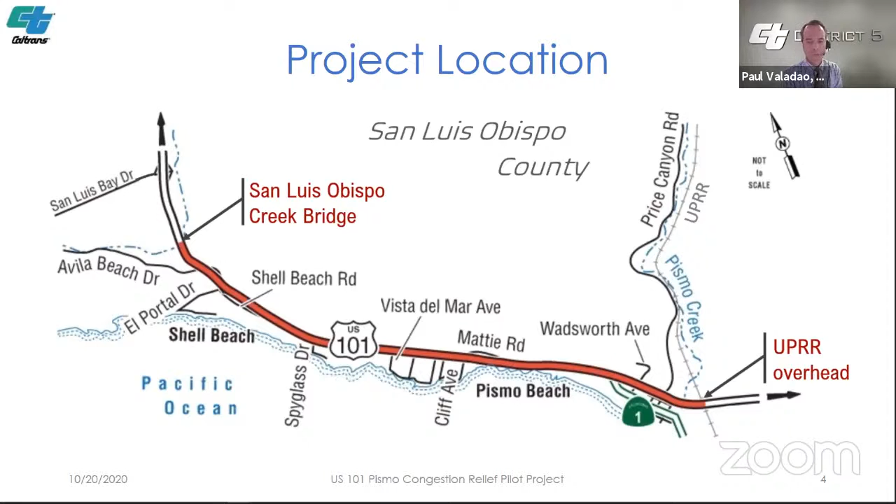Thank you, Stephen. I'm Paul Valadao, and I am the project manager for the Pismo Congestion Relief Pilot Project. The project is located as depicted in the presentation, spanning from San Luis Creek Bridge to the north, traveling along the southbound lanes to the railroad overhead bridge just south of Pismo Creek.

The project's purpose and need is to improve operations on southbound US 101 during peak travel periods. US 101 southbound lanes are operating at or near capacity during those peak travel periods.

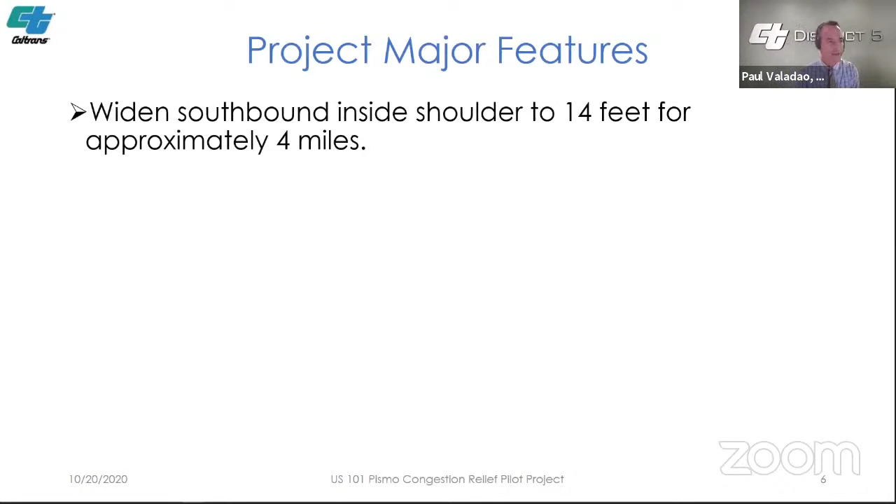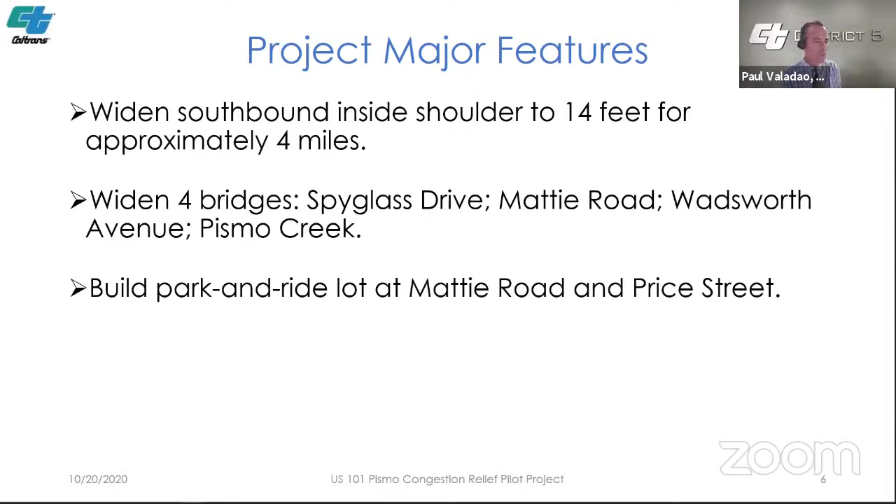The major project features include widening the southbound inside shoulder to 14 feet for approximately 4 miles. In that 4-mile widening, there are widenings of 4 bridges: Spyglass Drive, Mattie Road, Wadsworth Avenue, and Pismo Creek. As part of the project, there is a park and ride lot at Mattie Road and Price Street. We'll go into detail of that location here in a bit.

Finally, the major feature I would like to highlight is the construction of a retaining wall between 101 and Price Street, where we're trying to avoid the Pismo rock, which requires widening to the outside in that one instance.

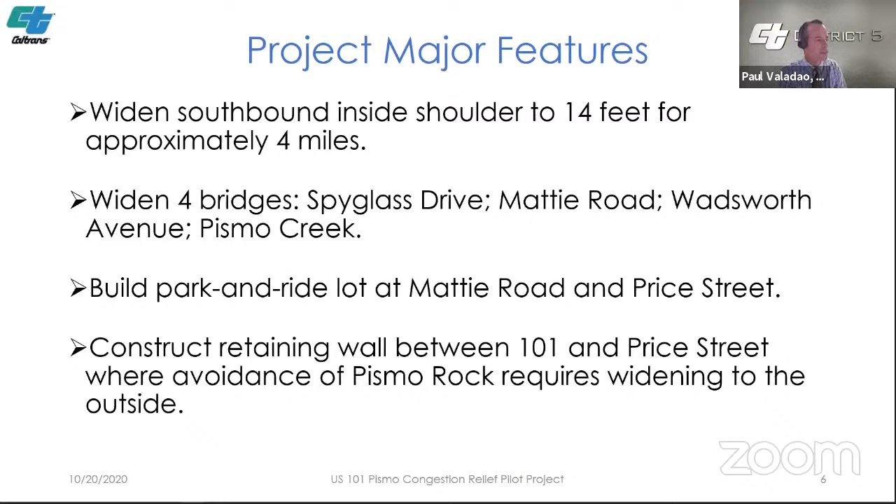Some of the alternatives that were considered but rejected include a full-time general purpose lane. When you're dealing with a full-time general purpose lane and not a part-time travel lane, it requires much wider shoulders to the left and right of travel, and our corridor through Shell Beach and Pismo Beach is just not wide enough to accommodate that.

Also, a high occupancy vehicle lane, sometimes known as a carpool lane or HOV lane, was not considered simply because that 4-mile length is often not enough of an investment in length to buddy up with a coworker and form a carpool.

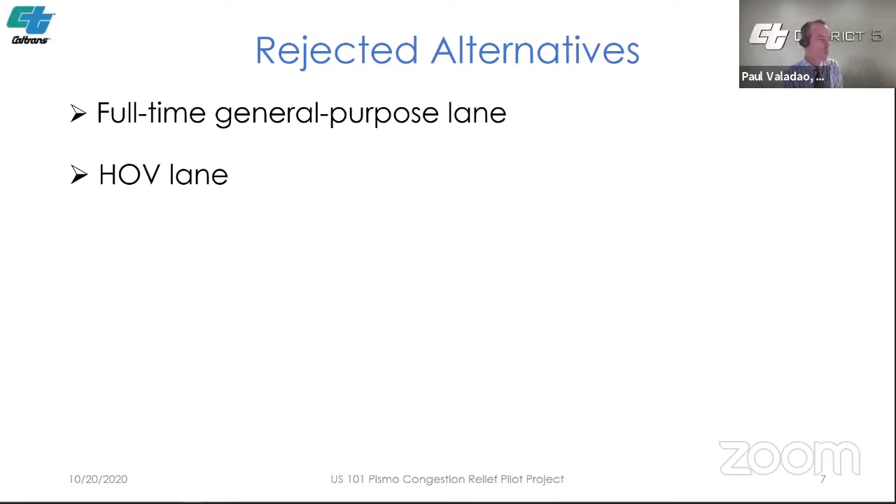Also, a median to house a reversing lane was not considered because of the coastal terrain. We're nestled up against the coastal ranges alongside the coastline, which simply was not conducive for a reversing lane.

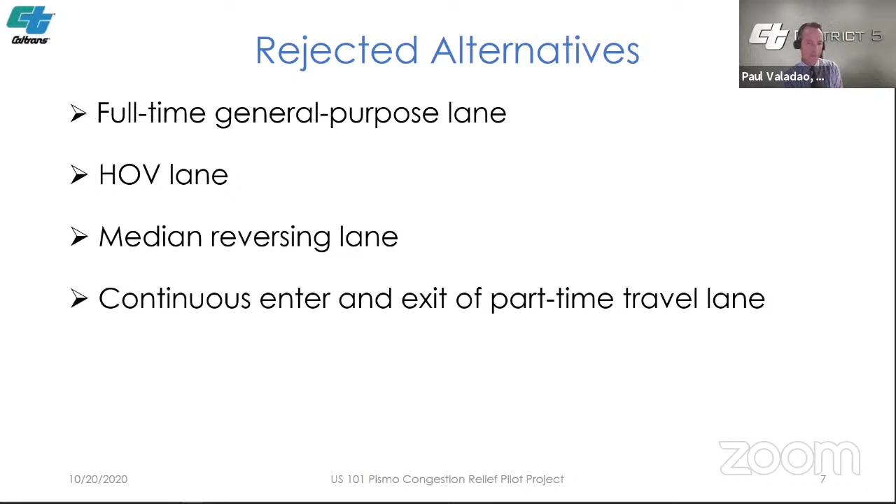Also, continuously entering and exiting this left shoulder part-time travel lane was not considered because it took away too much efficiency. So we have one enter, one exit for this part-time travel lane, maximizing efficiency for this 4-mile component.

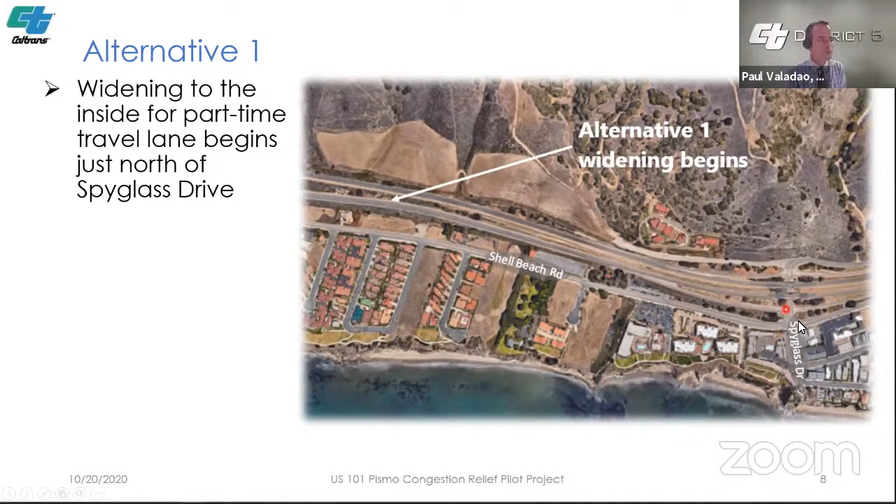We have 2 alternatives being proposed. The first, Alternative 1, is widening to the inside for the part-time travel lane, beginning just north of Spyglass Drive. It includes a median retaining wall at the start of the widening, and there is a variation to this alternative which extends the truck climbing lane that currently exists past the Spyglass Drive exit.

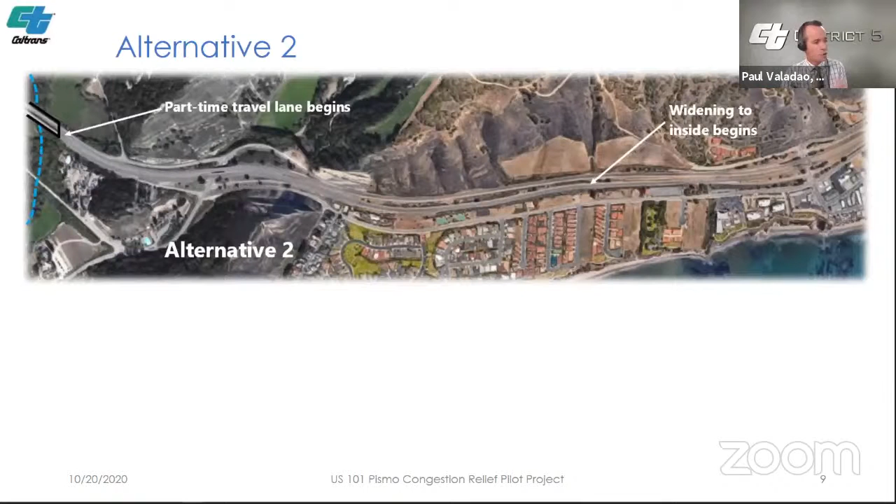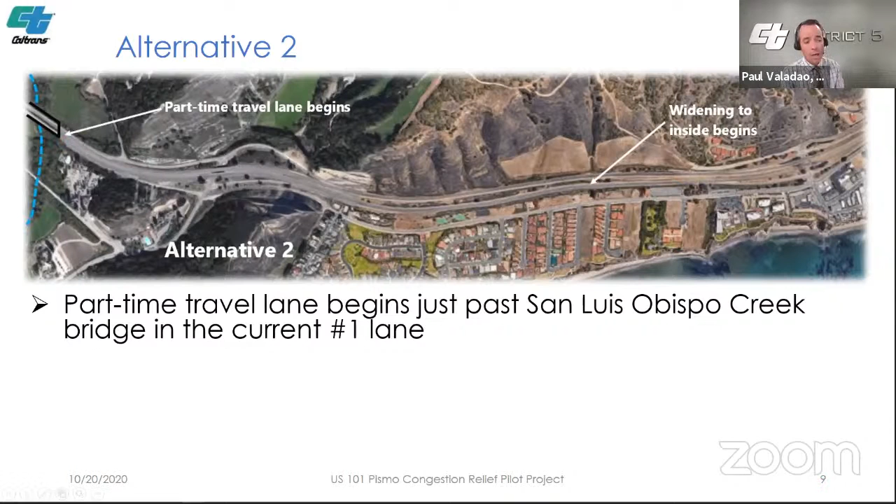Alternative number 2: the part-time travel lane begins just past San Luis Obispo Creek Bridge in the current number 1 lane, or leftmost lane. The truck climbing lane becomes a general travel lane, and the widening to the inside for the part-time travel lane begins north of Spyglass Drive.

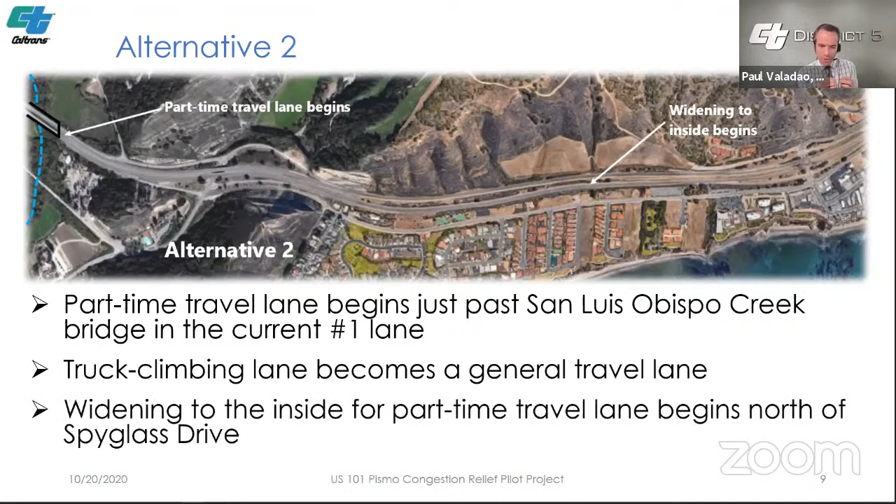Regarding the truck climbing lane in the context of these 2 alternatives: Alternative 1 without the variation maintains the truck climbing lane in its current configuration. Alternative 1 with the truck climbing lane variation extends the truck climbing lane to merge after the Spyglass Drive exit.

Alternative number 2 is to convert the truck climbing lane to a continuous general travel lane, taking that pavement real estate and using it all to configure the new left shoulder part-time travel lane and the two through lanes.

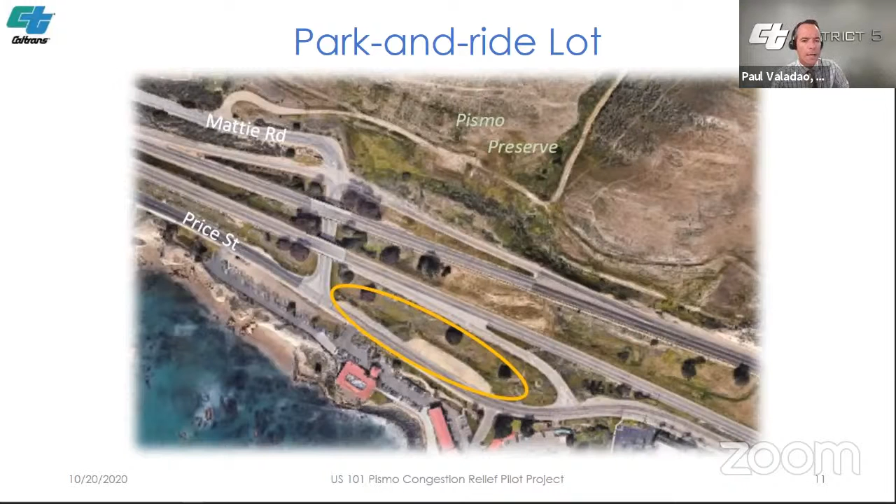As indicated earlier, and now honing in on the location, what you see encircled is the proposed park and ride lot. The dirt park and ride lot that's informally used will be expanded with more pavement and some more formal spaces to park in. Now I hand over my component of the presentation to our environmental coordinator, Paula Huddleston.

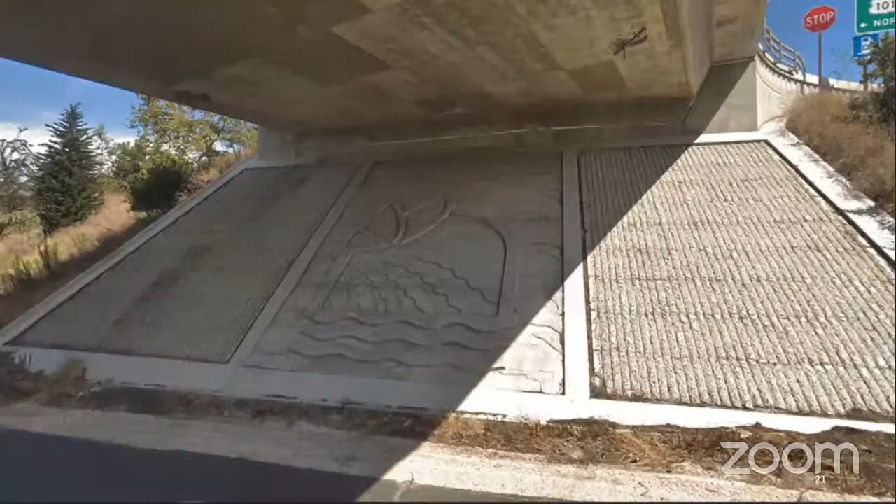The next slide, this is slope paving on 101 in Goleta. This is an idea that could be incorporated into our project because we will also be having slope paving. And the next slide's another example of slope paving.

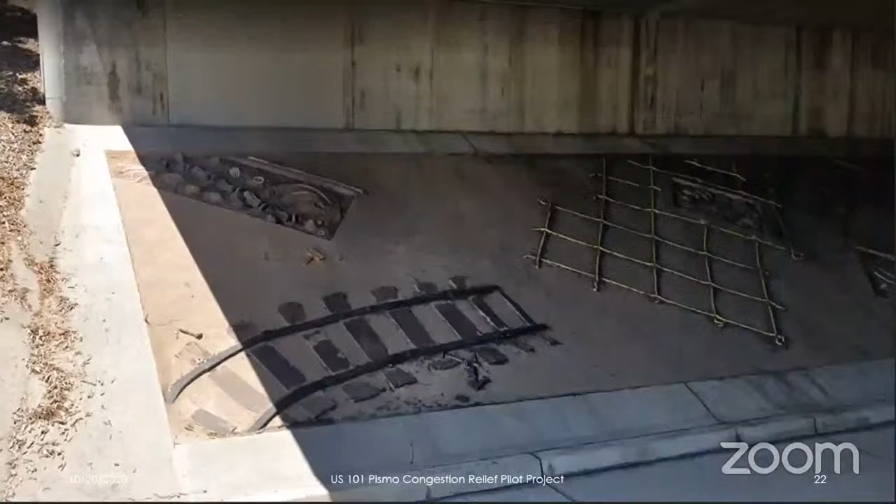It contains photos and information on the historical significance of the bridge. A lot of these were picked up by visitors to the Cold Spring Tavern. They thought it was really interesting.

So those are just some ideas of how we might create installations highlighting the Native American presence in Pismo. We'd work with the Chumash to come up with ideas that were specific to our region.

Okay, moving on to noise. I know this is what a lot of you want to hear about. It's important to note that the freeway noise level is expected to increase as a result of the project because people are going to be driving faster.

Whenever we have a project that could increase noise levels above 67 decibels or by more than 12 decibels, we are required to consider noise abatement. In this case, that would be noise barriers or sound walls.

It's important to know that we are not talking about the concrete safety barrier on the outside shoulder of the freeway. The sound walls would be from 8 to 12 feet tall.

I also want to stress that the sound walls we're going to be talking about today are not a definite part of the project. They're being evaluated as required, and no decision has been made yet about including them or not. The studies were done to show what would be necessary to reduce the noise levels from the project.

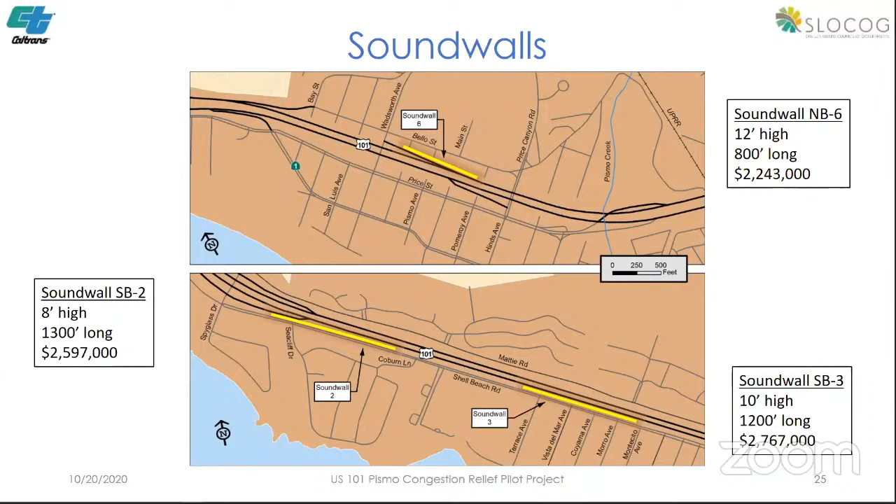Each of these walls has been estimated to cost just under $3 million. A decision about these sound walls won't be made until much later in the process, after we've heard from you and are starting final design of the project.

So as you can imagine, sound walls would have a major impact on the appearance of the freeway corridor and of the town itself. And most importantly, the southbound walls would block ocean views.

Even without the sound walls, though, the project would have a significant adverse impact on visual quality. The additional lanes, wider pavement, retaining walls, loss of vegetation, the lane use control signals - all of these components will create a much more urban appearance to the freeway corridor and would be somewhat out of scale with the rest of the small beach town community.

We've prepared some photo simulations of how the project could look. Now, keep in mind that these are just conceptual images and they're not necessarily how it will actually appear.

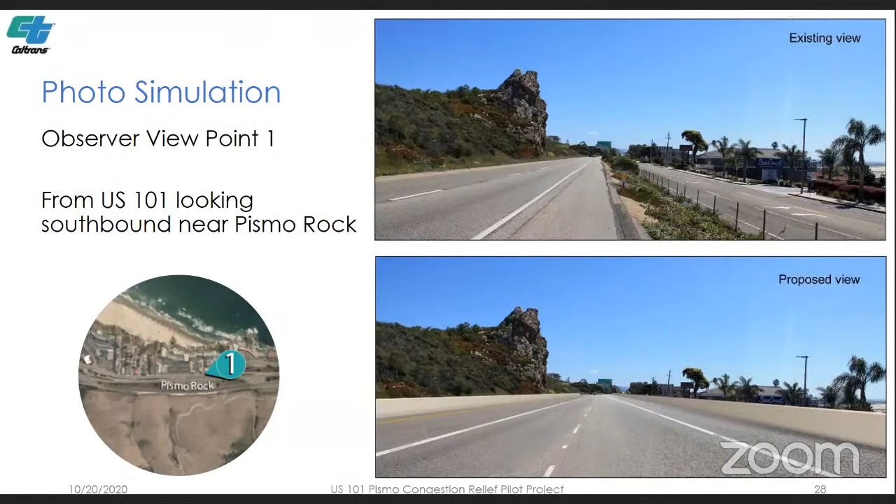At this location, the freeway lanes would have to be shifted over to the outside in order to swing around Pismo Rock. So that median would be filled in and a retaining wall constructed along Price Street, and then the safety barrier placed on top of the wall.

The part-time travel lane is shown on the left, and you can also see the new concrete median barrier, which is going to be taller than we've had before.

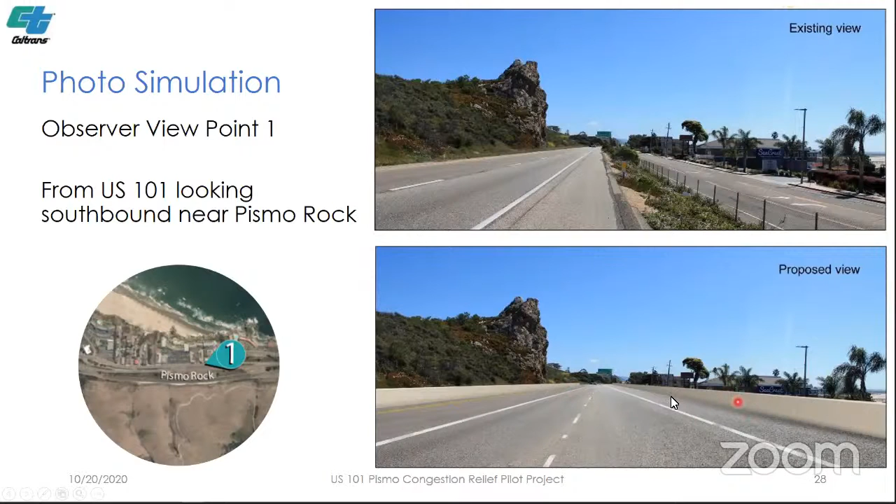The next slide, viewpoint number 2. This is looking southbound in the vicinity of the sound wall number 2, which you can see on the right. If this wall were built, it would actually sit on top of the safety barrier, not behind it, and the appearance would be a little more seamless than shown in this photo.

You can also see the new median barrier on the left. Any of the walls, the median barrier, any concrete surfaces - these would all receive some sort of aesthetic treatment like color or texture or both.

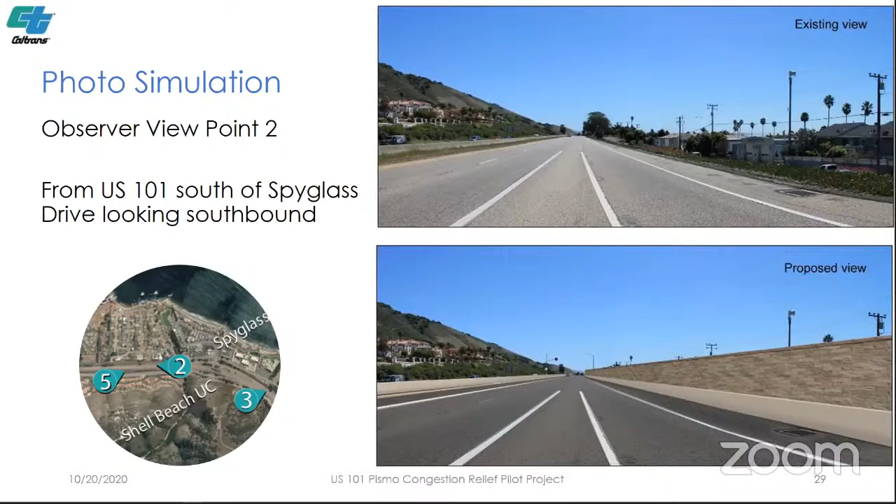The next slide, viewpoint number 3. This is from the northbound lanes looking towards the coast, and you can see the new median barrier. Depending on the height of your vehicle and its position in the lanes, this barrier could obscure the ocean view.

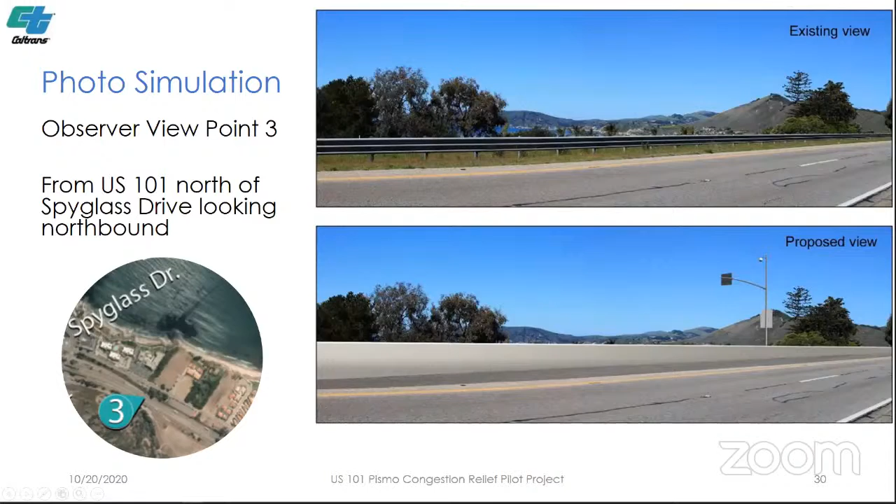Next slide, viewpoint 4. This is from Shell Beach Road looking towards the highway in the vicinity of Sound Wall 3. We haven't made any decision on what sort of aesthetic treatment any walls or other surfaces would get at this point. We would revegetate as much as possible as well. The vegetation shown in this simulation would be after several years of growth.

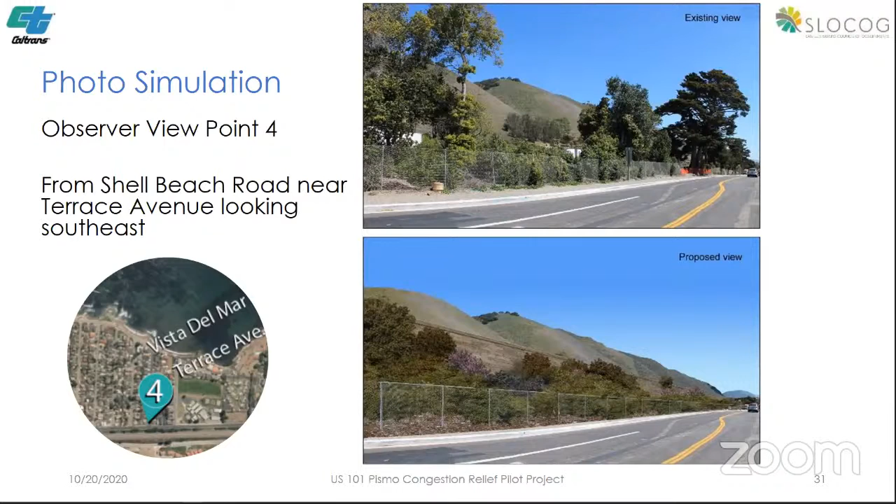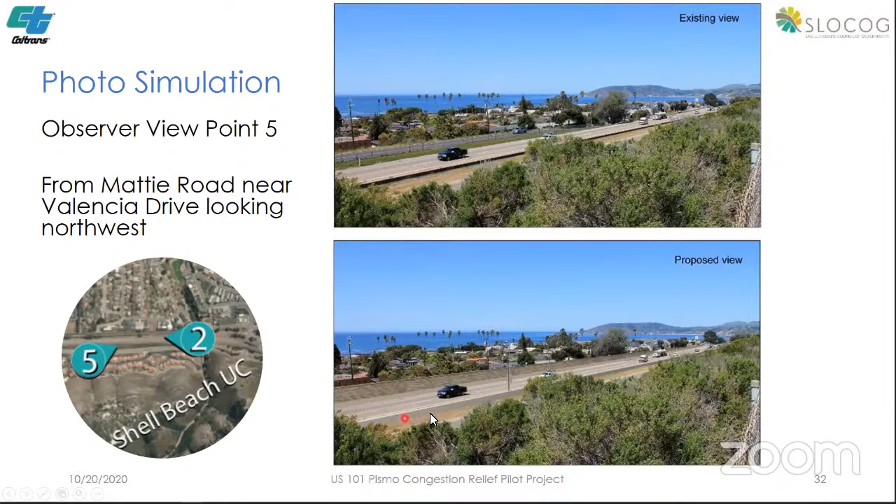The next slide, viewpoint 5. This is from Mattie Road looking down on the highway towards wall number 3 in the background, and you can also see the southbound lanes as well as the median barrier.

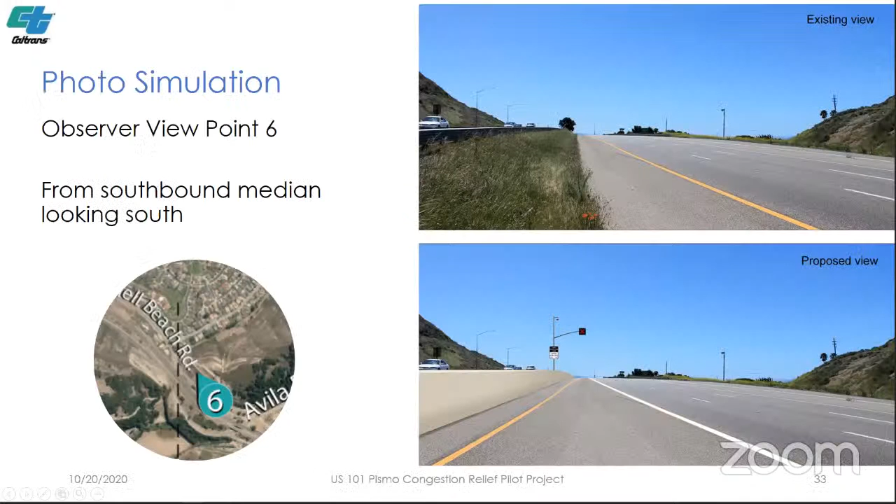The next slide, viewpoint number 6. This is at the northern end of the project looking southbound. This shows the new part-time travel lane that would be replacing the median, and you can also see one of the lane use control signals. Again, these images just give a rough idea of how the project would sit within the existing corridor.

So moving on to air quality. We all know that traffic congestion creates pollution and poor air quality, and you'd think that by improving congestion, we would improve air quality as well. However, once vehicles are going faster than about 55 miles per hour, they actually become less efficient and start producing higher carbon dioxide levels.

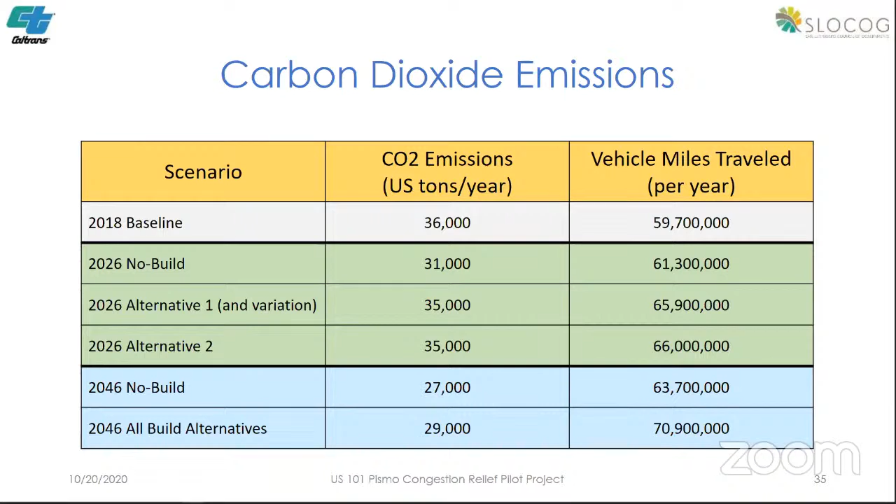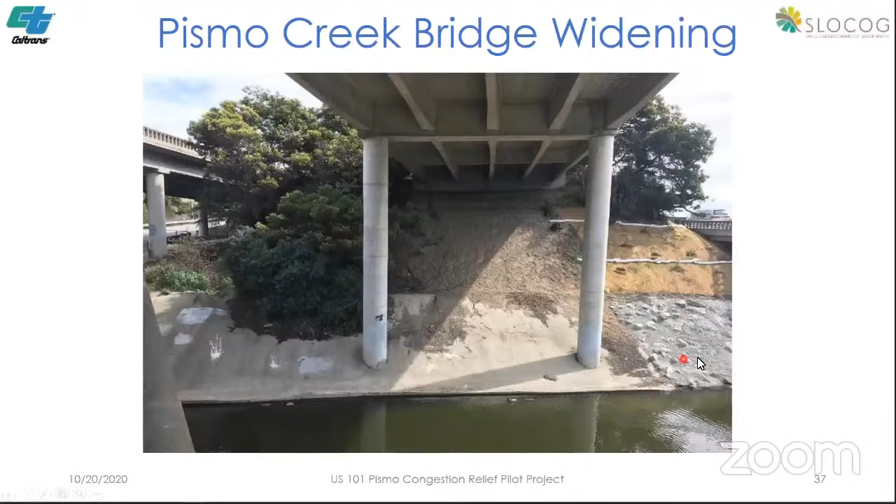Moving on to biology, the project really isn't expected to have much of an impact on biological resources. Mostly it would involve the work being planned with widening the Pismo Creek Bridge. In the next slide, you can see the bridge here looking in the southbound direction. We'll be putting in a new column on the left, and the slope paving would all be replaced with grouted rock slope protection like you can see on the right there of this photo.

Next photo, again, you can see the 2 new columns shown in red. We're also going to be installing sheet piling at the base of the slope. The sheet piling will result in a crenellated edge like what you can see on the left side of the creek there.

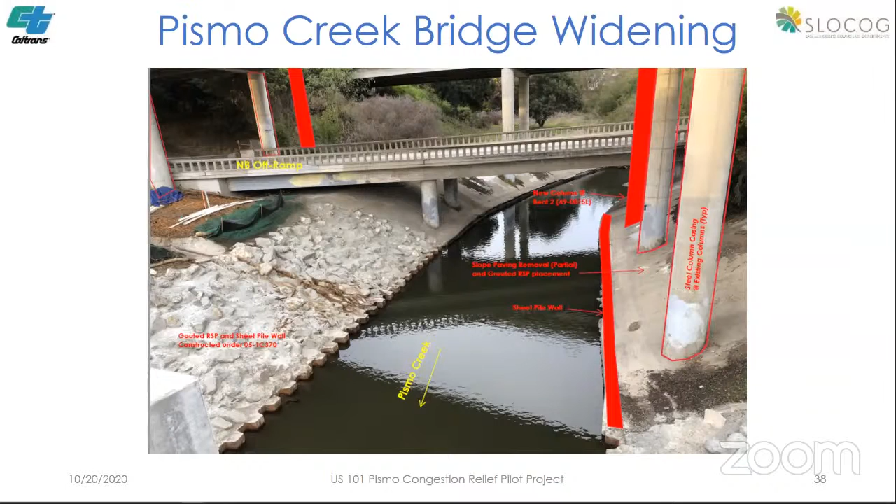The sheet piling is going to require a little bit of dewatering. We're going to use gravel bags, just dewater the small area needed, take the gravel bags back out, and that's pretty much it for the creek.

The project's going to require several permits from other agencies. Most of these are for the work being done in the creek, but an important one I want to call attention to is the Coastal Zone Development Permit. This permit is important because it's going to provide another opportunity for a hearing and public input. The project is actually within the jurisdiction of 3 separate permitting agencies.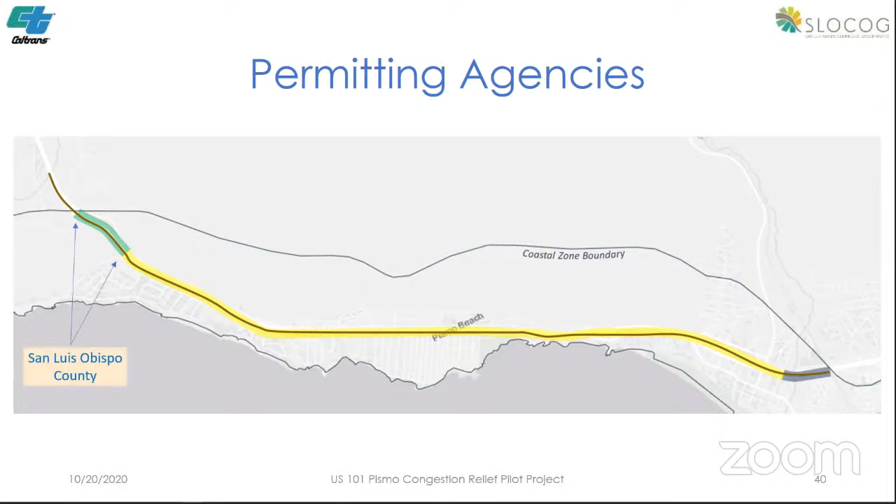Thank you, Paula. That was a great presentation on our environmental stewardship by the project.

Good evening, everyone. My name is Sam Toe, and I'm the traffic operation engineer for this project. I'm a Cal Poly alumni who has worked for Caltrans District 5 traffic operations for more than 20 years, and I love living in this beautiful Central Coast, having been in this area for over 30 years. So as everyone knows, this is a congestion relief project.

Right-sizing the project is very important through a detailed traffic operations analysis before any solutions can be proposed. Therefore, we need to first understand the issues that the corridor is having. So how do we go about identifying the deficiency of this corridor? We do it by field observation and field data collection.

For the next 10 slides, I'll be using Google navigation map that most people are familiar with to illustrate the existing condition. To orientate everyone on the map, the Pismo Rock is right there, the Dinosaur Cave, the Spyglass Interchange, and the Avila Beach Drive Interchange. So everybody can get yourself orientated on the map, and as we go through the slides, you'll get to know what we're talking about.

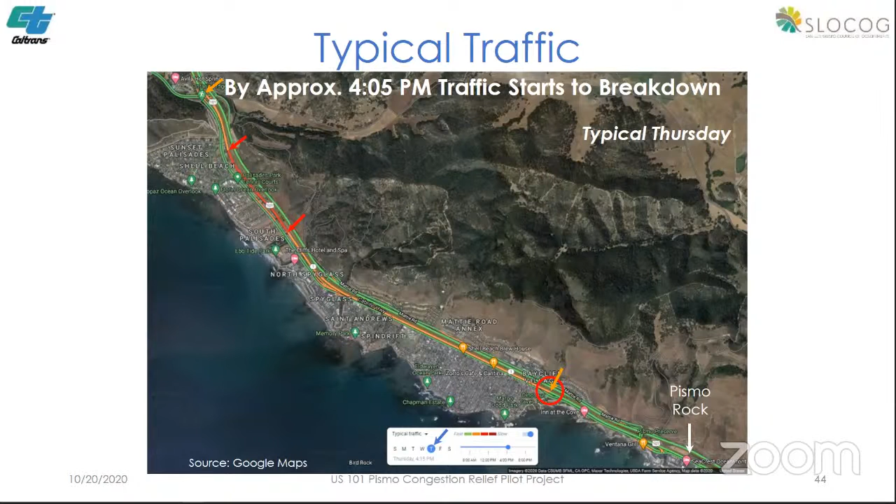The next slide is when we reach around 5:05 p.m. We start to see traffic start to ease up a little bit. And in the next two slides, you also see that the bottleneck would fluctuate between Spyglass and Shell Beach area, as indicated by the red circle, and the slowdown segment will fluctuate as well between Avila Beach Drive and Shell Beach area.

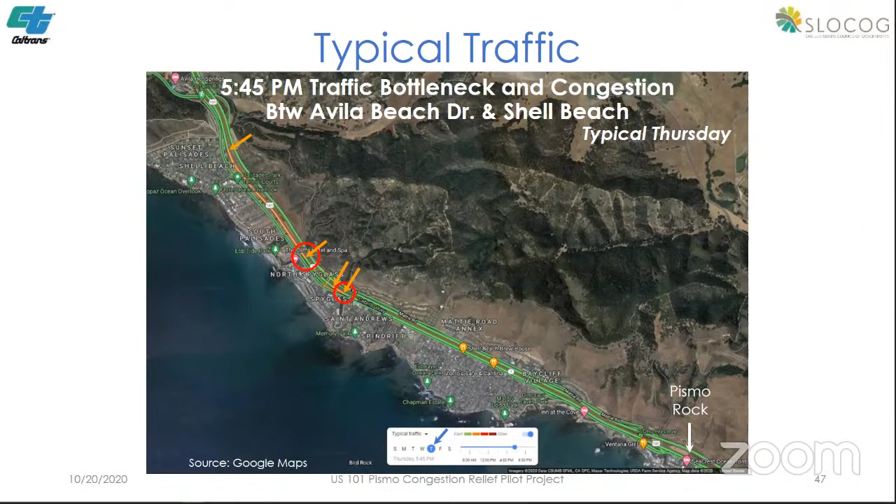So we go to the next slide at 5:25. You can see the bottleneck and where the slowdown segments are at 5:45, and you start to see the traffic is starting to ease up a little bit around 5:45. So if we toggle back and forth between 5:05 and 5:45, you can see how the bottleneck and the slowdown of the traffic fluctuates between this time period.

Okay, and then the next slide will be at 5:55 p.m. You see that the traffic is free-flowing again. So this is for a typical Thursday traffic.

And someone may ask, how about Friday? How about Friday typical traffic, how does it look like? If we go to the next slide, Friday typical traffic would start to slow down around 3:25 p.m. That distinct bottleneck that we talked about gets closer to the Pismo Rock area, and the traffic congestion would extend from Pismo, San Luis Obispo Creek all the way down to near where Pismo Rock is.

Also, we see the stop-and-go traffic was observed between Avila Beach Drive and the truck climbing lane merge, as indicated by the red line. This breakdown would last about an hour as well, and the congestion will continue to around 6:10 p.m. on a typical Friday. Now, how about Saturday?

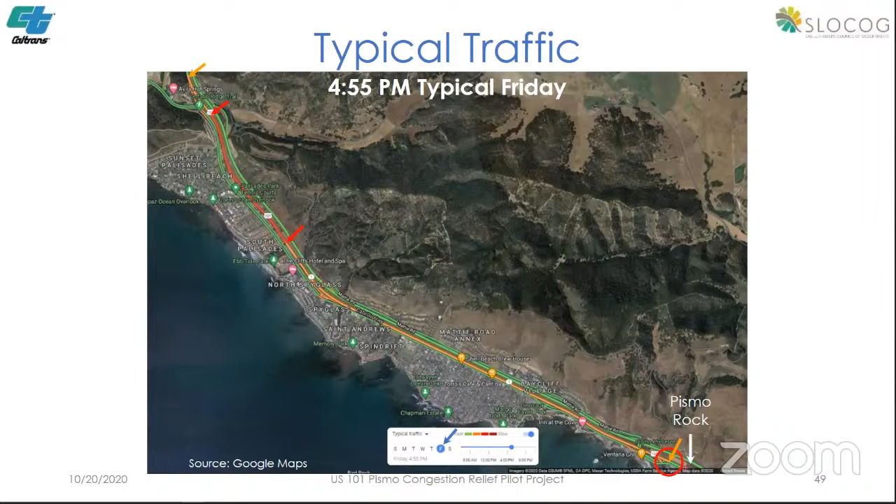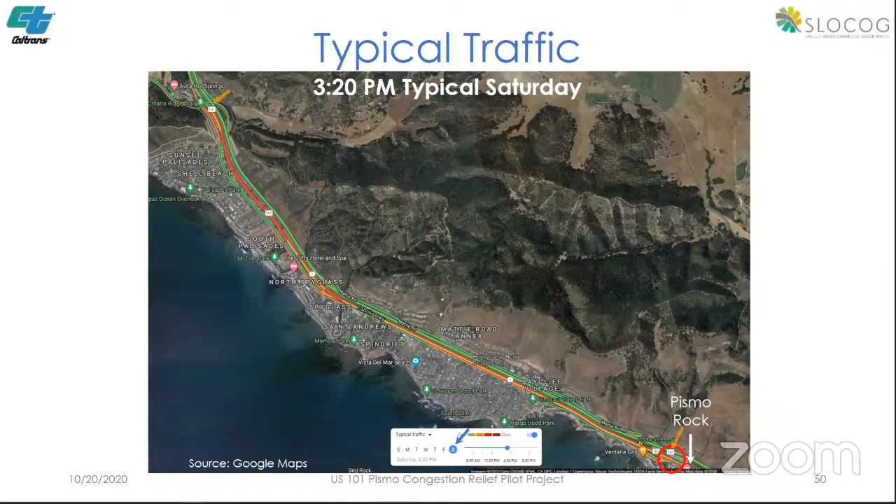Saturday typical traffic, how does it look like? We see the slowdown starts around 2 p.m., and the distinct bottleneck would occur between Dinosaur Cave and Pismo Beach as well. This is the extent of the congestion as shown by the red, orange line and the orange arrows.

The stop and go conditions would start around 2:30 or so between Avila Beach Drive and the truck climbing lane merge area, which is very similar to what we've seen in previous typical day's traffic. The traffic breakdown lasted about 2 hours and 15 minutes on Saturday, and congestion continued to about 5:40 p.m. on a typical Saturday.

With this understanding of the existing condition, during our traffic studies we ran through 122 scenarios of combinations of improvements that we could think of. The top three scenarios that surfaced gave us the best traffic performance and benefit cost ratio, and are the right size for this corridor. We selected alternative one.

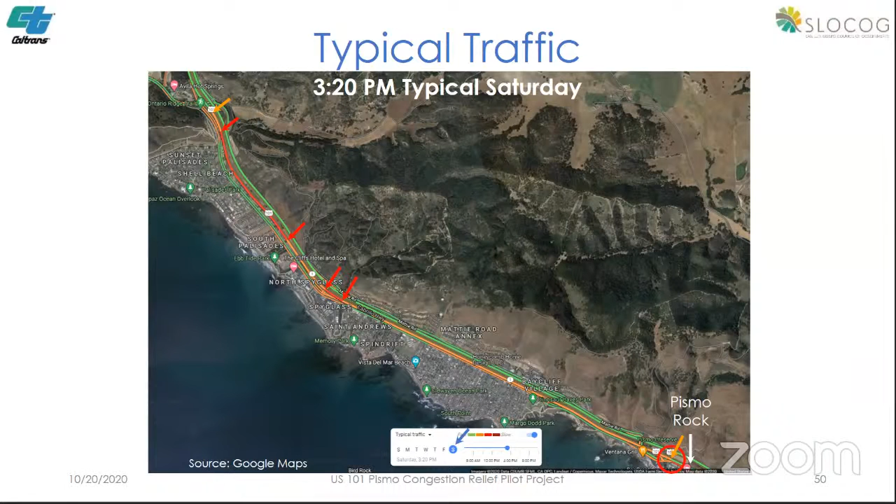Variation, and alternative 2. Traffic analysis were performed for the year 2026 and 2046, and the conclusion from that study is that the part-time lane will continue to perform well beyond 2046 during the peak periods of 2 p.m. to 7 p.m.

So the next slide, we're going to show everyone the traffic control devices that will be implemented in the project. The first thing is the lane control signal, as shown in that green down arrow. It will be mounted on a Caltrans standard signal and lighting standard.

Second will be the sign package that's been approved by the California Traffic Control Devices Committee (CTCDC), the Federal Highway Administration (FHWA), as well as Caltrans headquarters.

Looking at this sign package, these signs will all be placed on the left side of the freeway, and the direction of travel is indicated from left to right, top to bottom. As a driver, as you drive down the freeway southbound, the first thing you will see is a sign that says left shoulder driving permitted 1 mile ahead.

Then a quarter mile down the road, you'll see shoulder driving permitted on green arrow. Further down another quarter mile, you'll see left shoulder driving permitted half mile ahead. Then it's repeated by the shoulder driving permitted on green arrow at a quarter mile and also at the beginning of the part-time lane.

The same sign that says shoulder driving permitted on green arrow will be mounted on every signal pole. As you drive through the part-time lane, as you get close to the end, you'll see shoulder driving ends at half mile, at quarter mile, and then shoulder driving ends. After that you will see two standard signs posted that say do not drive on shoulder and emergency stopping only.

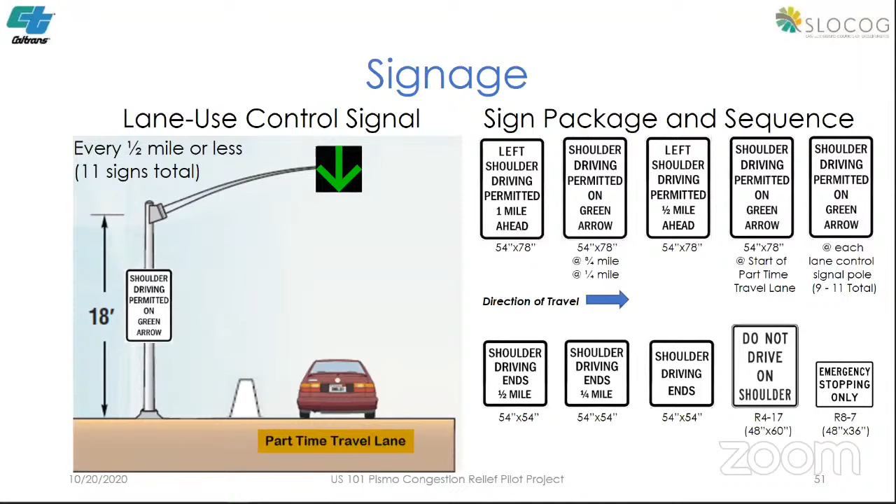Okay, and then the next slide will be a VISSIM traffic simulation for the project that we created. The purpose of this simulation video is to illustrate, from a fly-through view, how it would look like driving through the project. Before I run the simulation videos, a few things I want to point out on the video.

This video is simulating the opening year 2026 and is for alternative 1, which is the part-time lane with the truck lane remaining as is. In the lower left corner you will see a timestamp; we're trying to simulate the traffic at 4:30 p.m. There will be blue text in the video that provides a waypoint for everyone to orientate themselves as we drive down the corridor. Also, this is a split screen video, as you can see.

Sorry, Sam, technical difficulties. Here we go.

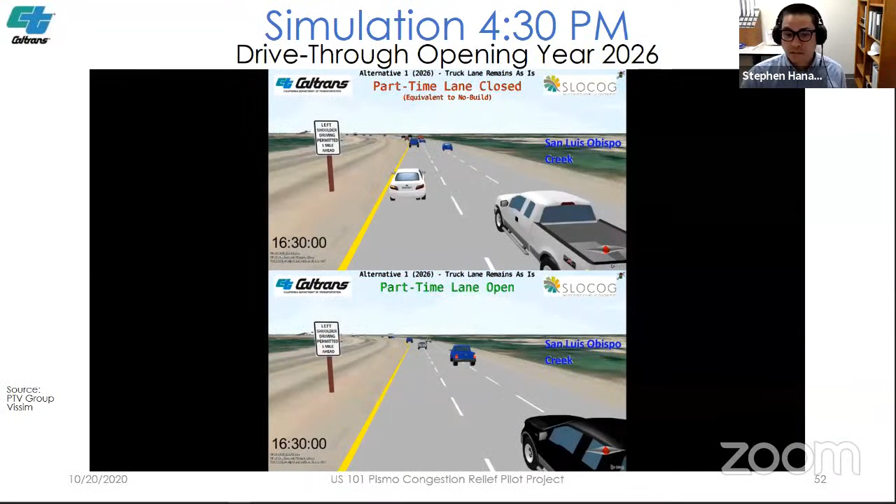Okay, great. You can see this is a split screen video. The top screen simulates the traffic when there is no part-time lane, and the lower screen simulates when there is a part-time lane. In that way, we can compare the difference. This video is sped up 2 times faster because of the time constraint for the presentation. It's a 2 minute long video.

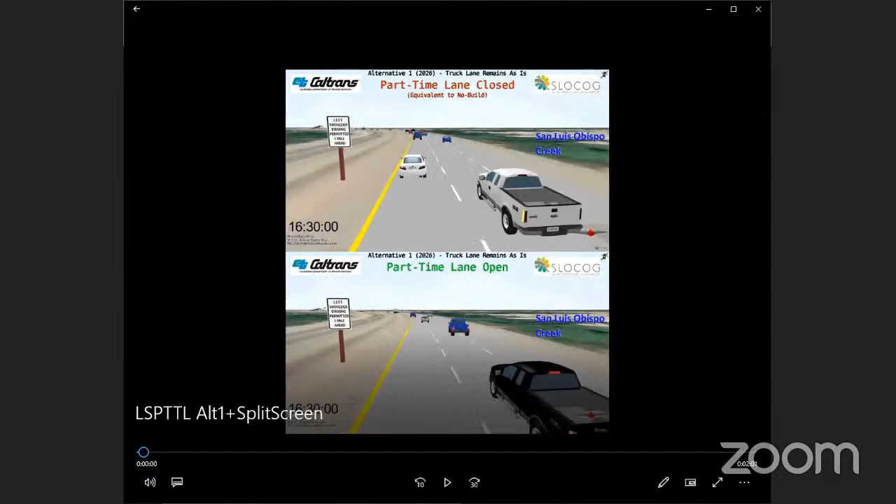This simulation starts near San Luis Obispo Creek, and as we drive southbound, coming up to the Avila Beach Drive off-ramp with the signs on the left. We pass the Avila Beach Drive interchange, coming out of the Avila Beach Drive on-ramp area, and we have the half-mile ahead sign. You can see the top is when there's no part-time lane, which is what we're seeing today, with congestion on the freeway.

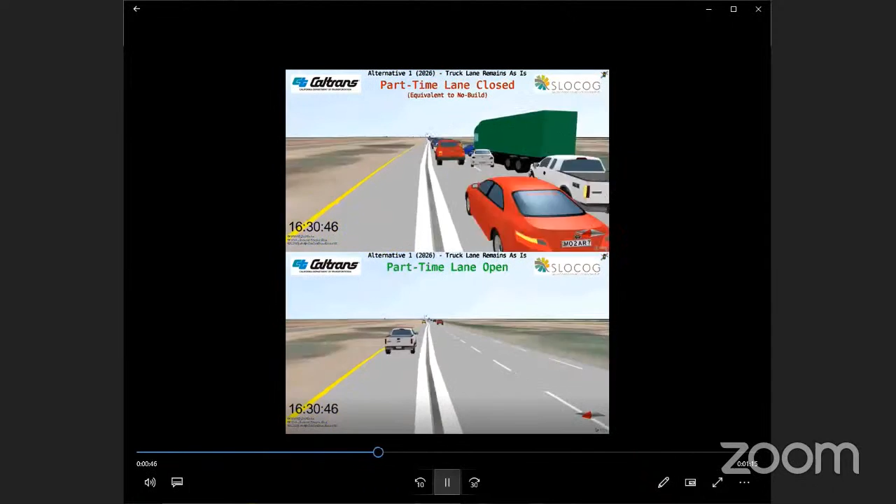Truck lane remains as is. We're coming up to the Spyglass off-ramp area, driving over the Spyglass interchange, and here's the Spyglass on-ramp.

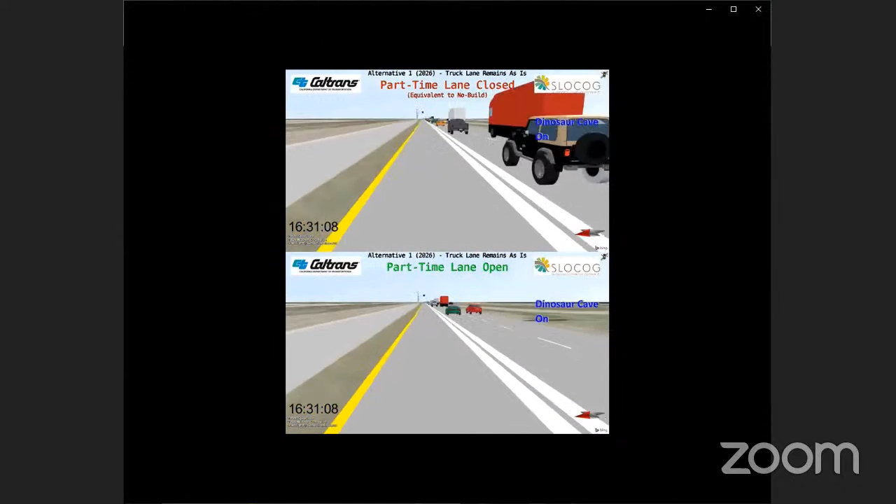As you can see in the top video, the traffic is much denser than in the lower video when the part-time lane is open.

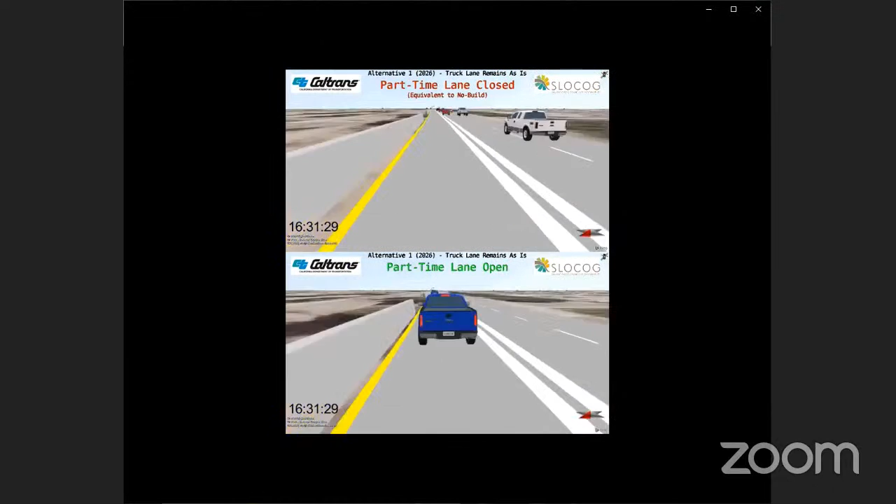Coming up to the Price Street off-ramp, which is the Mattie interchange, and then the Pismo Beach off-ramp. Here's the first sign for the half-mile ending of the part-time lane, then the quarter mile marker. That's the Price Street on-ramp, and the part-time lane ends.

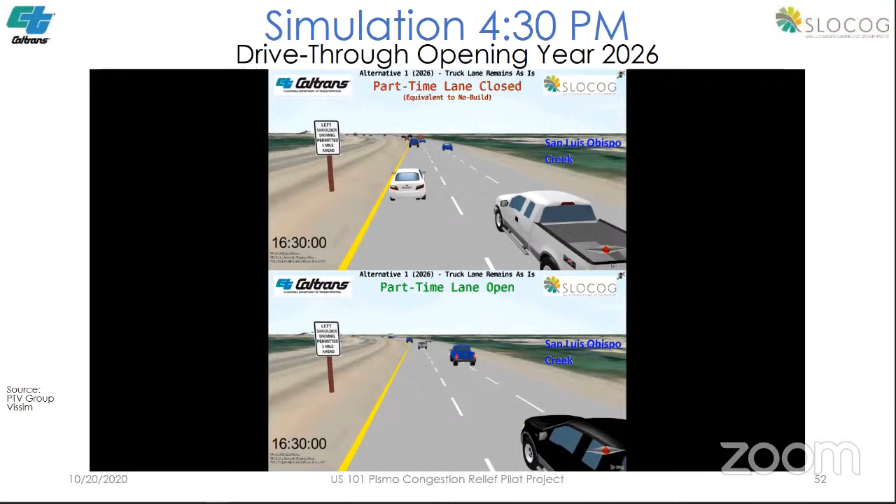I'm Stephen Hanamaikai, transportation planner with SLOCOG. We're the sponsor for this project, and we work closely with state agencies, in this case Caltrans, to fund and build transportation projects.

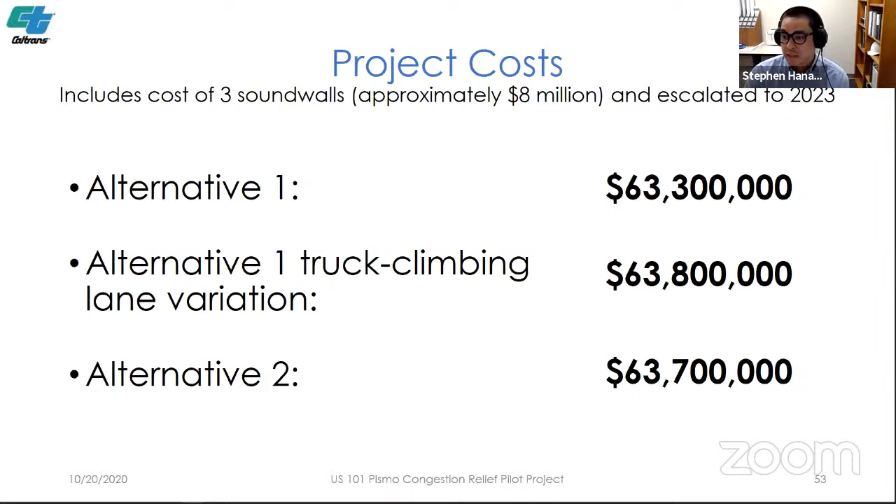What we are showing here is the current spread of construction costs, which includes about $8 million for the construction of three sound walls noted by Paul. These costs are escalated to 2023, the anticipated year of construction. You'll notice slight variation in costs, with a high of $63.8 million and a low of $63.3 million, reflecting slight variations in the designs of the three alternatives described by Paul.

SLOCOG has invested $21.8 million toward a no-sound-wall construction scenario, with a total escalated construction cost of $58 million. Of that $21.8 million investment, half is budgeted toward the developmental phases of the project - the current environmental document phase, design work, and right-of-way - and the other half, $10.9 million, is allocated toward construction.

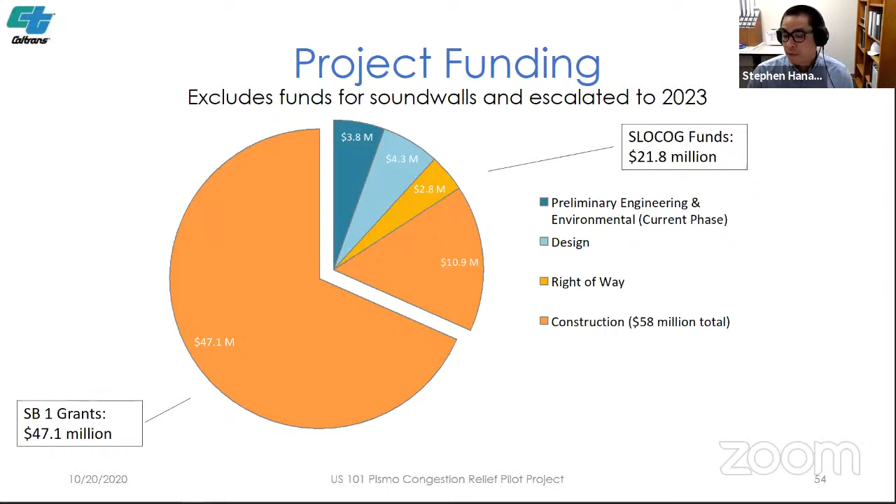For the remaining $47.1 million for construction, SLOCOG is pursuing a state grant, and that application is currently under consideration by the California Transportation Commission. We should know by mid-November whether we were successful in that grant.

This concludes the presentation portion of the project, and at this point we'll open it up to questions and comments.

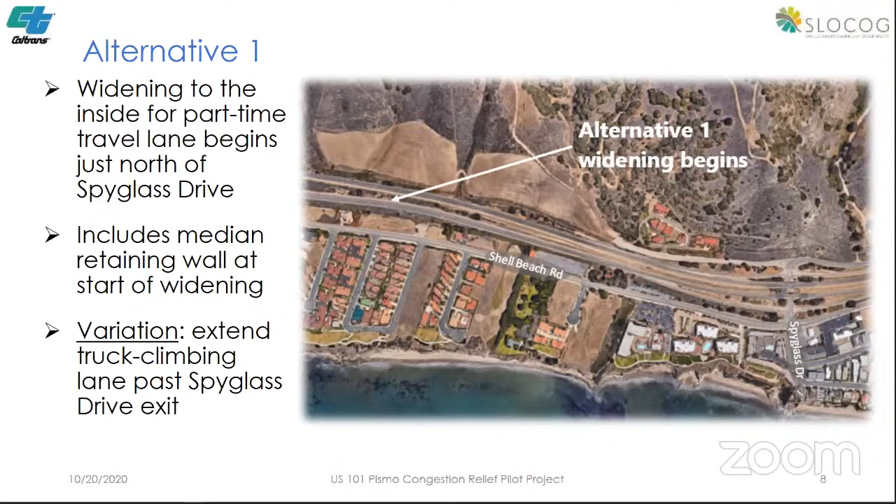As best I could, I took a look and reviewed the 161 pages and tried to digest that. I also printed out the aerial view, the 13 sheets of the proposed plan. As far as my question goes, I was a little confused about Alternative 1 and Alternative 2 regarding the passing lane or truck climbing lane coming up Spyglass. Currently that's a big problem, creating a lot of bottleneck. I'm totally in favor of seeing that extended past the off-ramp, at least past the Spyglass off-ramp. I know people try to use it as a true auxiliary lane, but it still ends up becoming a bottleneck. For those of us who live in Shell Beach, rather than having to merge over into the slow lane and slowly progress for another quarter mile up to the off-ramp, it's a large inconvenience - I say that strictly for the residents here.

So I don't know how the alternates work here. If the truck climbing lane is extended at least past the off ramp, does that change where the shoulder, the temporary use lane, begins? Or does that temporary use lane begin at the same point further down the hill towards Avila? That's my question. I've got a couple of questions or comments, if I could go ahead with my comments before the question is answered. Yeah, let's go ahead and do that, and then we'll have Caltrans speak to your question about the operation of the three alternatives.

Okay. The retaining wall along Price Street, between Mattie Road and wherever it goes, is 1,200 feet long or whatever it is. That retaining wall, I understand the purpose. It's in order to widen the lanes and shift them to the right towards the beach, the ocean side, and get them around the Pismo Rock.

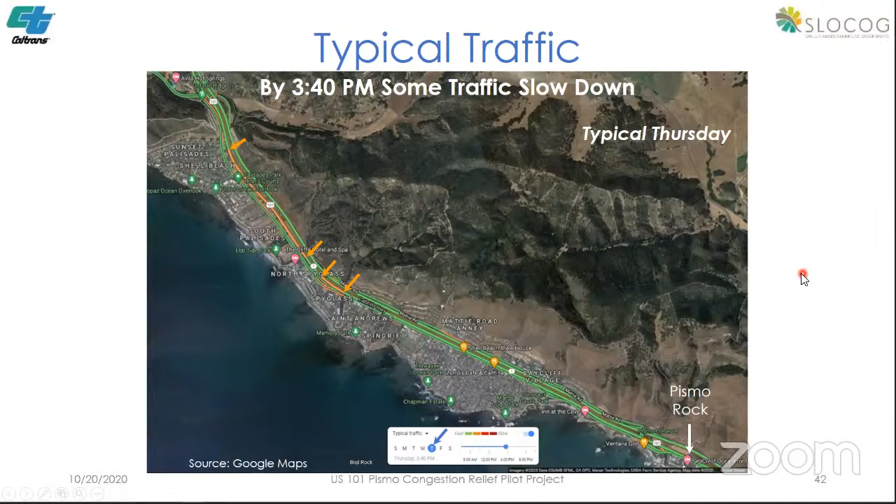Sam, did you want to respond to this? George, I appreciate your comments. I can respond to that. So if we go back to my original second slide of the presentation, we see that the actual bottleneck causing the slowdown that backs up all the way to the Spyglass area and also the Avila Beach interchange is actually further down south. But we do recognize that the truck climbing lane does exacerbate the problem.

So if we look at the second or third slide, that circle is actually where the real bottleneck of the freeway is, causing a slowdown that backs up all the way north. So for alternative one variation, what we've done in our project is start the truck climbing, or part-time lane, about a 1/3 mile north of the Spyglass exit, which is also slightly north of where the truck merge lane is. So we end up with 4-lane capacity right in that section, allowing us to handle the traffic capacity needed to send traffic downstream.

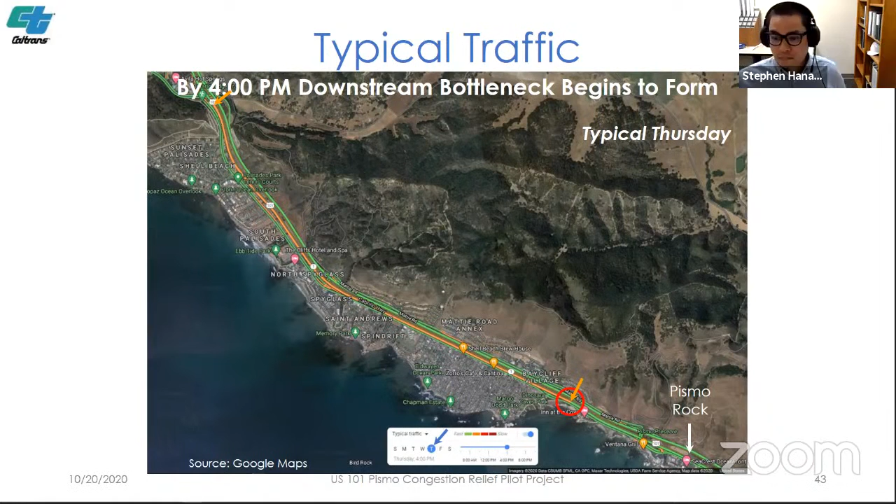And for alternative number 2, we see that we remove the truck climbing lane, which will address your concern about idiots driving through and merging to the left. But we still need the third lane capacity, so we open up the part-time lanes so that we have 3-lane capacity all the way down south through the corridor.

And I hope that kind of addresses your concern. Yeah, thank you. I think that's a great response, Sam.

George, I would encourage you, if you'd like to look more at the traffic analysis and data, to reach out to one of the members of the PDT, the project development team, and we can pass along to you some more detailed traffic analysis.

I appreciate that, and I'll be watching. But if you're not familiar with driving that section of road, even the signage for the truck climbing lane is non-existent, and it's confusing if you go into that lane and then suddenly find yourself on Avila Beach Drive where it merges back into two lanes, a poor location. Also, truckers aren't using that climbing lane anymore because of accelerating cars coming up on their right-hand side, and they can't move over in time.

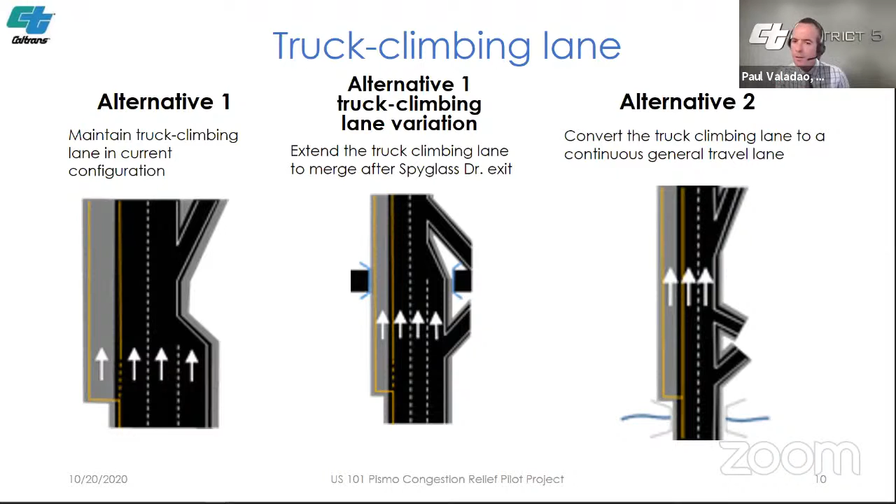I need to call... there we go. It looks like it was also brought up as an item on the Pismo City Council tonight. Sorry to interject here in front of Craig's response to Paula's question, but it was mentioned on the South County Chamber of Commerce website. They reiterated the fact that this meeting was occurring, and love or hate Zoom, right? This is our new reality for the time being. So it allowed some of our team members to be virtually in two places at once. David Beard skipped out on the beginning portion of our presentation to provide a similar but truncated version of this presentation at the city council meeting with the city of Pismo today, starting at the same time.

When this is done, we'll have a recording that we will share along with that email address for submitting public comments through the deadline. So we'll continue to get the word out so that people can still have a voice and still watch the presentation. We're accepting comments until November 17th.

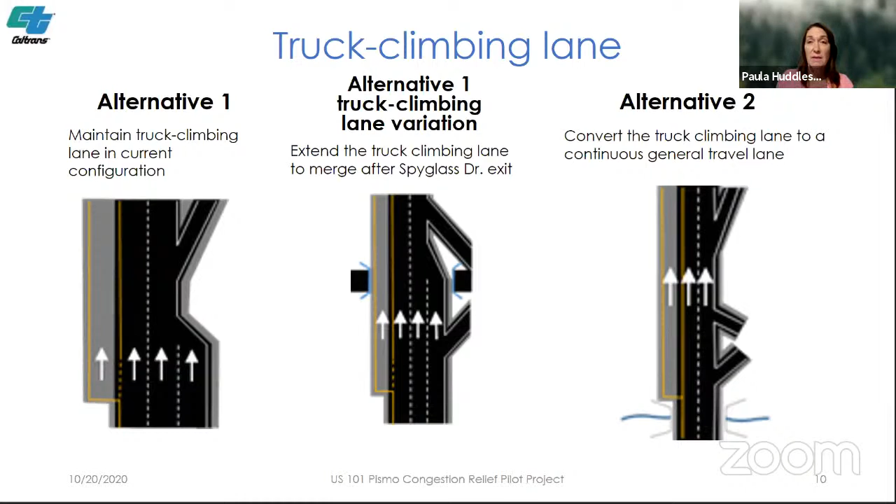Okay, it looks like we actually have another question from Craig. Craig, would you like to state your question? Am I unmuted at this point? You're unmuted. Oh, I'm sorry, I thought I was still muted. Well, I was going to respond to the question that was presented to me. Do I have any suggestions on a better way to do this? Not really.

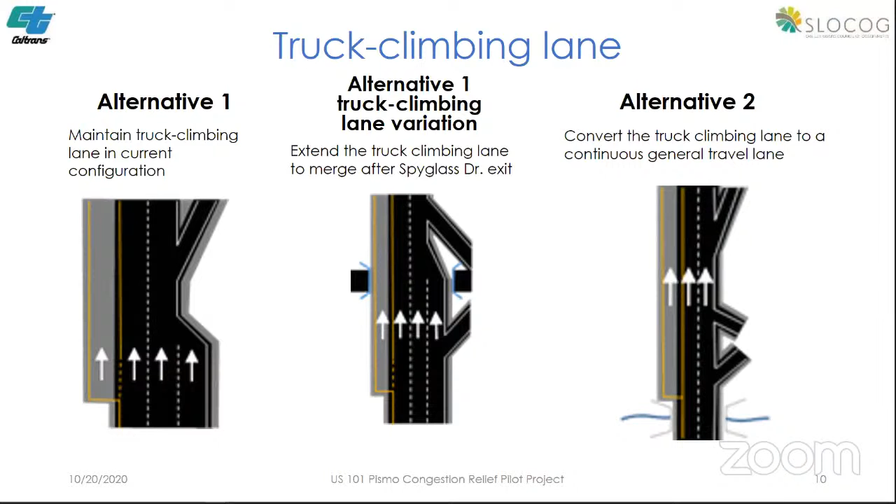Effie McDermott, our local historian here for Pismo and Shell Beach, with the SOS page on Facebook, is the way I was notified about this. I try to attend as many planning commission meetings that we have via Zoom and that type of thing. But Effie McDermott is the star when it comes to getting the word out.

I don't know, what is the SOS page? SOS, Save Old Shell Beach. Okay, is that the same? Do they have a YouTube channel where they provide updates on the Shell Beach Streetscape project? A YouTube channel, I don't know. Okay, I've seen that, I was just curious.

The other organization that we have in our community here is SBIG. I did email them, and I might have even emailed Save Our Old Shell Beach. I looked for groups and emailed them as well.

Okay, well, if you did your best, you did your best. Like I said, it was word of mouth through the Facebook page for me. I'm just glad that I heard about it and was able to take a look at the documents. I like to be involved. No, we are likewise. Those are good things that we try to strive for. So I appreciate those comments, Craig.

And yeah, some new leads. The South County Chamber of Commerce, they also announced this Zoom meeting as well, I believe.